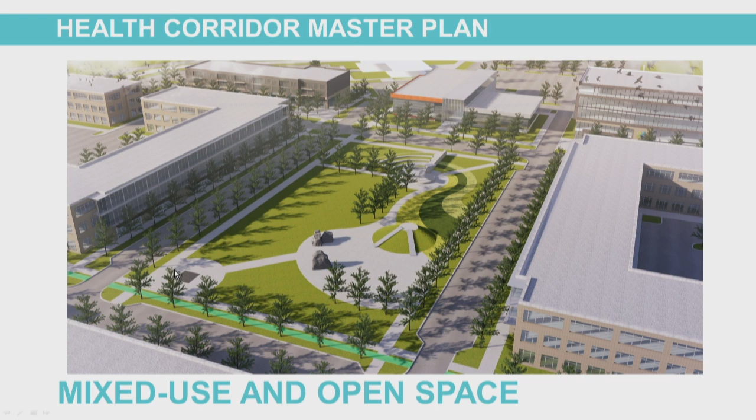During the process, we really heard that transportation and mobility improvements within the corridor were key to making this corridor successful. As previously discussed, here we're showing some mobility improvements on Ironwood Drive.

We'd like to focus here on the walkways and cycle tracks that are buffered from the roadway by these planter beds on each side. This really helps improve safety and mobility for pedestrians. We're also showing 2 travel lanes with a center turn lane and median, and some on-street parking.

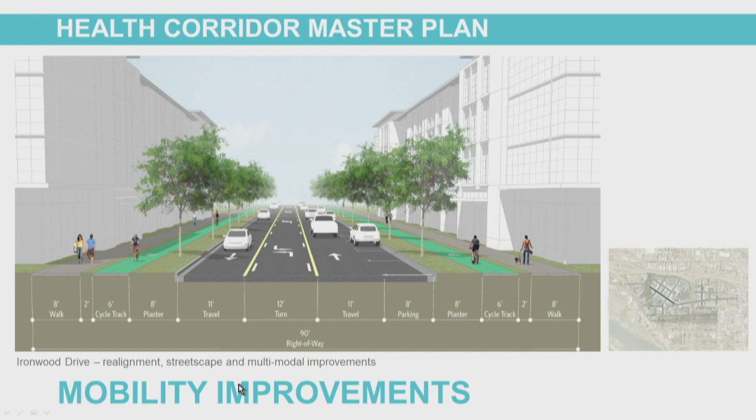These next several graphics show some of the adjacent streets within the street network next to Ironwood, such as Lakewood Drive and what we call New Health Drive or Shopko Avenue. These are pretty similar to Ironwood. They provide on-street parking and buffered walkways from the roadway, focusing on greenscape and that new park we're proposing as a central gathering place for the corridor.

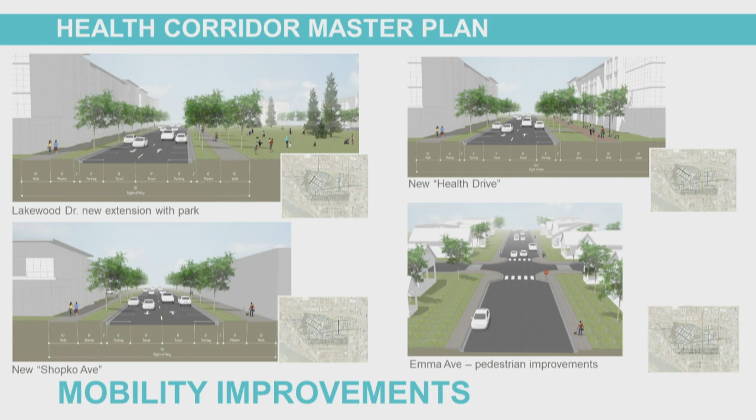I'd also like to touch on Emma Avenue and Davidson. We're proposing pedestrian improvements here with traffic calming measures as part of these bulb outs you see on the sidewalk. I'd also like to mention that an additional traffic study is needed in the future to help finalize the full transportation vision within the corridor.

To summarize my last slide, partnership is really the key to attaining this long-term vision. The Urban Renewal District is a step to attain the ultimate build-out, which again will likely take longer than the 20-year duration of the district.

The big takeaway here is that with the help of private sector stakeholders, the city, Ignite CDA, and Kootenai Health, all have committed to help establish major changes in the health corridor over the next 2 decades.

I'd also like to mention that the final master plan and economic feasibility study deliverables are scheduled to be submitted to Ignite CDA at the end of this month, and the master plan will be available on the Ignite CDA website sometime during the first week of October.

So with that, that concludes my brief update tonight.

Questions or comments? In that updated map and the boundaries, yes, and one of my concern points was, even though I appreciate the idea of extending Ironwood beyond Government Way, but that's not going to happen, so why even?

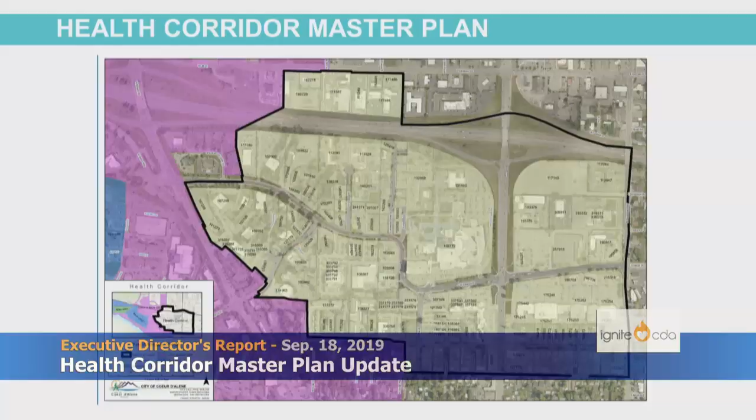So it looks like that's not even in the long term. That is outside the boundaries of the district. Okay, correct, good. Do you mind elaborating on Shopko Drive?

I understand that was one of the priorities as far as attracting private investment in some kind of neighborhood clusters, mixed use. Shopko Drive runs north-south on the east side of Highway 95, and we're envisioning some mixed-use development there, and we have some new hotels where La Quinta is shown right now. Does that answer your question adequately?

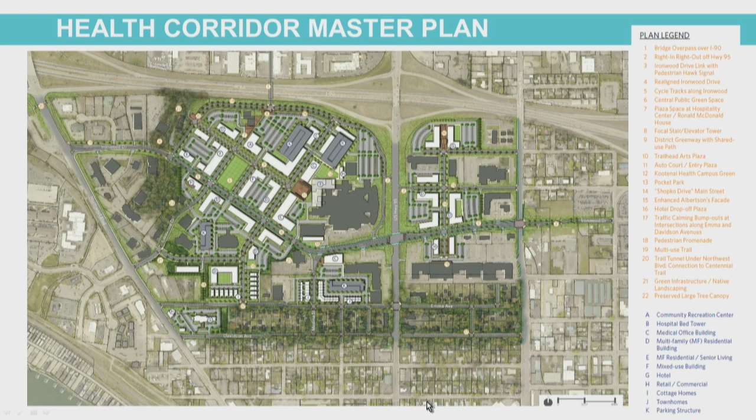And does the master plan present priorities in sequencing? Yes, definitely. The master plan will include some phasing diagrams of what we think should come first and the next steps, so that will definitely be included in the plan forthcoming. Great, thanks.

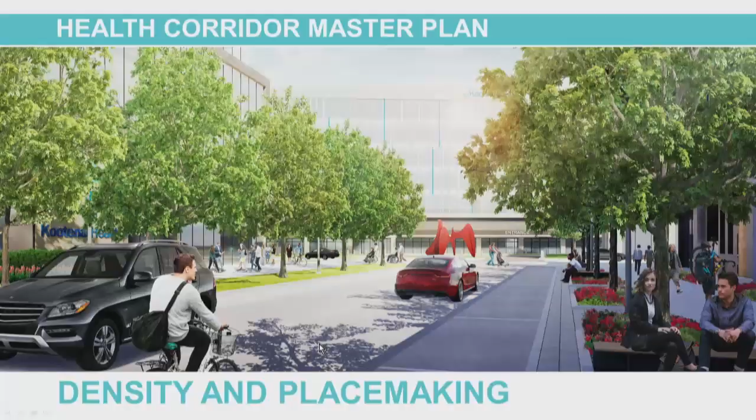A quick question. You showed a future bed tower. It looked like 4 or 5 stories in a sketch there. It's kind of hard to see at this angle. Is that something in the near future, or is that something way off you envisioned? I don't know if I can speak for exactly the timing of that, but that's just a concept that has been discussed with Kootenai Health.

It's something in discussion. Was it a priority of theirs? Yes, it is a priority, and as for timing, they're not quite sure when they'll pull the trigger on that, but it'll be sooner than later. Oh, so it is something serious in discussion. Okay, well, great. I think that's great.

Thank you. Any other comments or questions?

Mr. Chairman, just to follow up on timing: the master plan and the economic feasibility plan will be wrapped up by the end of this month, and then we will look to gather a special call meeting for the board, probably the second week of October, to go through that in detail, both the plan and the economic feasibility study.

Daniel's team is already in the process of drafting a draft urban renewal plan that would incorporate the master plan and economic feasibility study, and all that will be coming together around the second week of October. Then, with board approval, it would enter into the city process of going through the planning commission and ultimately to city council for a thumbs up or thumbs down in the December timeframe.

So we're still on track to make a presentation to city council for their decision in December.

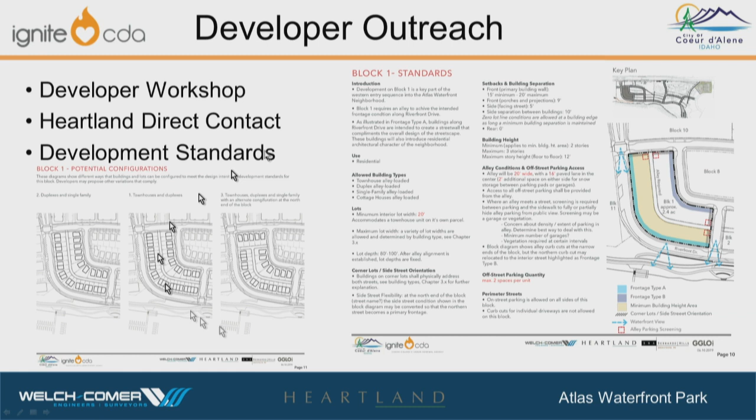The objective was to ensure, one, we had sufficient demand for the land uses. Two, we were giving them the opportunity to say, you guys are crazy, or why did you do it this way, or did you think of this? And just give us feedback, because we want to be able to hit the street, we being Ignite and the City, with a really solid product and obviously generate sales on it. So Heartland went out and did that.

The point of this is to, as best we can, provide the opportunity for those products to be achieved out there. It's a little challenging to do single family at that quantity because there's just not enough land. Also, the residual land value of single-family, according to Heartland, is not as high as townhomes — a townhome lot will sell for more than a single-family lot of similar square footage. And you don't achieve the density with single-family, and part of the idea is to have a sufficiently dense neighborhood that creates a place, as opposed to a big single-family neighborhood.

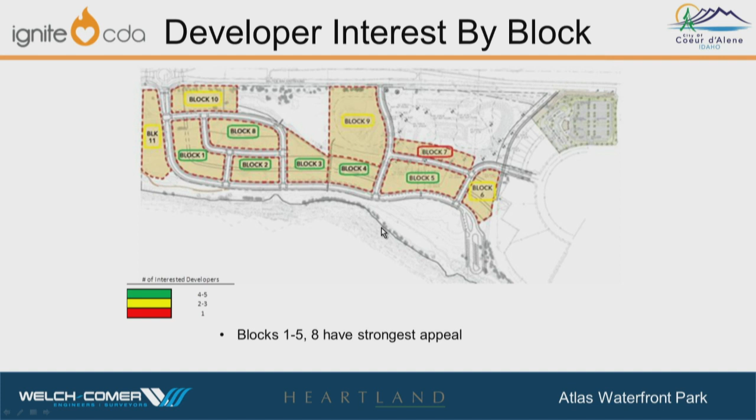At one point, there was space for a restaurant kind of thing in the middle. Is that still in the mix? Councilman English, that parcel doesn't show up on this drawing, but it's in all the others. I apologize for that. It's kind of the premier parcel because it's right along the park, along the river, and it's also a topic of parking discussion that I'll get to in a second. This is kind of the segue into it.

The city obviously has parking standards. Believe it or not, developers don't want to minimize the parking because it actually comes back and hurts them. I think you guys might have heard that in some discussions here, where they don't want to underpark a project because it doesn't bode well for their next phase. So this is what we heard from them on the residential side, pretty darn close to the city standard. Interesting on the duplex, but not surprising that they think there should be one more unit on a duplex — one space per dwelling unit.

On the commercial side, this is where it gets challenging. The simplest way to describe it is that the city standards promote big parking lots — think of Riverstone, those are big parking lots. You have on-street parking as well that's available. At Riverstone, where there's a little less single-family residential or townhomes, when the streets fill up there's probably not much angst about it. Now think about Le Peep and that Bellerive corridor, and the angst the council has gone through there, where residents are frustrated that the commercial facility is underparked, meaning there's not a sufficient number of spaces, so they park in residential areas, and the residential people think those are their parking spots, which they're not, but that's the belief.

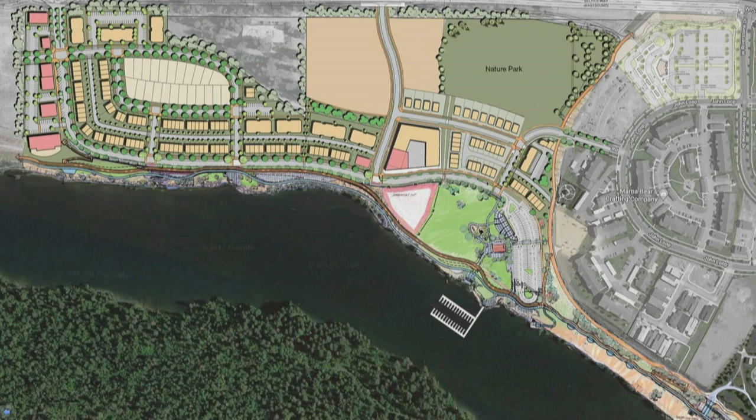So Phil, clarity there, if we're selling it by the square foot, what difference would it make if they're 30-foot or 40-foot lots? You're going to have more houses or more density as far as structures go. So if you have more housing and density in that parcel you sold, if you're a developer and you sold it, you probably don't care much. If you're Ignite and you're counting on increment, your increment's going to be basically the same whether you build a $400,000 house there or two $200,000 houses on that footprint. It's the same increment, except you'd have the homeowner's exemption twice, I guess.

When Heartland ran the numbers, and we iterated and iterated and iterated on that very point, we kept having to drive density to develop higher land values, so the increment over time was sufficient for the city, for Ignite to build the infrastructure and reimburse the city.

But again, the market will drive what the market's going to drive there. That's why, when we get through our meeting tomorrow, we might make some adjustments to the lot width. And the developers—one of the things in the RFP—will always have latitude to ask us. If they say, hey, we want to take a 30-foot townhome lot and go to 100 feet, well, that's probably going to trigger a visit back to Planning Commission, because we didn't portray that. But if they say, hey, we want to go from 30 to 32 feet, that might be something accommodated at staff level.

Sure. If you're on zero lot lines, you can do a pretty nice unit on 30 feet. Yep, zero lot line with no setback. I think the key is to be flexible and see what the market dictates.

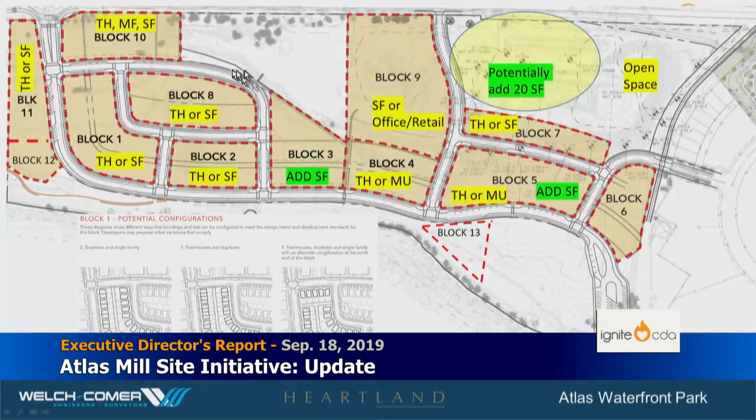I just threw this slide in here to give everybody a snapshot of where the potential to add single family is. The ones that you see, townhome, multifamily, single family, those exist in the development standards now. So if the market is dictating, and if single family is so popular, one might envision that all of the things that you see that say SF turn into SF.

The two green areas here are where we currently don't have single family for a design reason. One, I mentioned earlier, about making this a more commercial corner, and this one just doesn't fit very well because the commercial nature, the mixed-use nature of this corner, takes up a lot of space.

So the Reader's Digest version of what you're seeing here is we used aerial photographs to replicate where the pits used to be—photographs going back to the 50s—and did our best going out and digging test holes and borings to try to determine how deep they were.

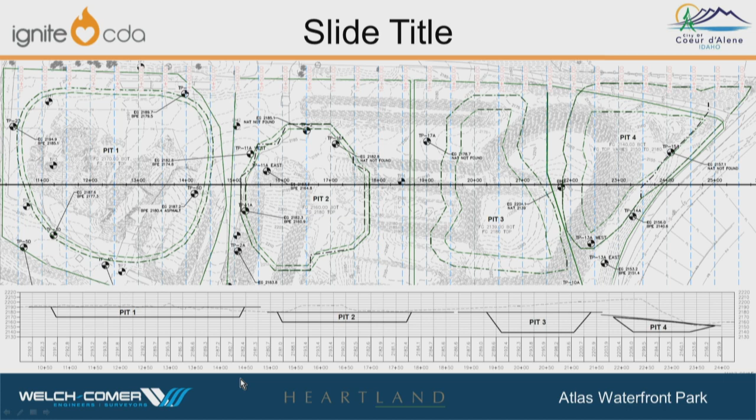Back to the question around single family and the blocks where there's a possibility to add it, where it's not currently there. Is that reflecting what the developers said, because they indicated higher demand from what was presented? But what's the Heartland's view on that? I'm trying to differentiate what the market will bear versus what the community needs in terms of housing product and options. I worry about this turning into a huge single-family development just because that's what developers say, maybe because it's their preference or their business model. But I want to make sure we're honest to the original intention of ensuring an appropriate housing mix for what the community actually needs.

I anticipate you won't see any single family added there, you won't see any single family added there. It kind of fits up in here, and townhomes could also fit up in here, but I don't anticipate putting it here, and don't anticipate putting it back here.

GGLO's Don Vehige, the person you've met, I think would turn himself inside out if we asked to put single family there, because he's really passionate about keeping a certain character there. He's done these developments all across the nation and in Canada, so he knows what creates a place, and that's what we're after. I just wanted to put it out to make sure the board understood the flexibility that exists there, but I don't anticipate, Commissioner Mandel, that we would bring that forward. You would see that. Thanks.

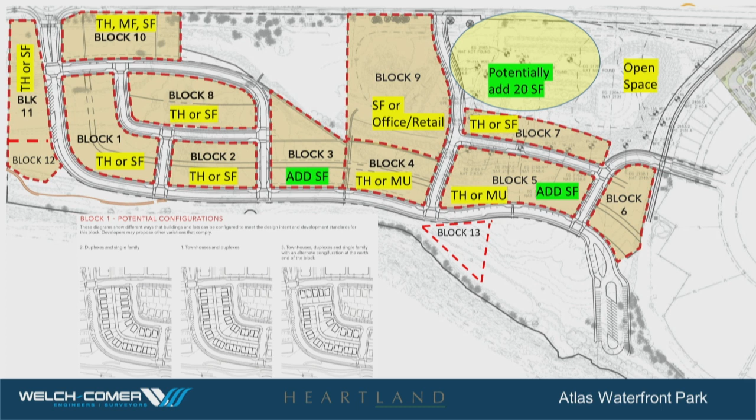Wouldn't it change the feasibility study also, because there's a different increment on single family versus multifamily? Yes, yep. So we've got to keep that in mind.